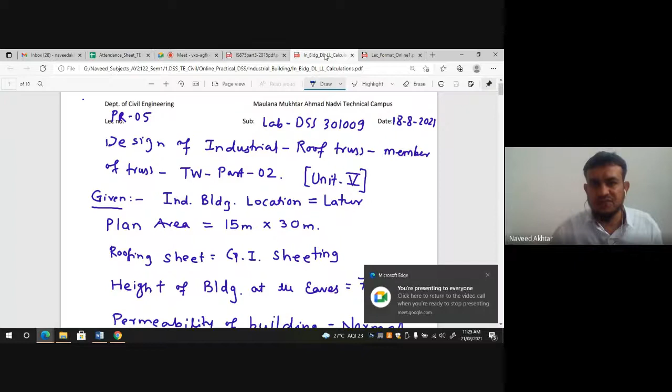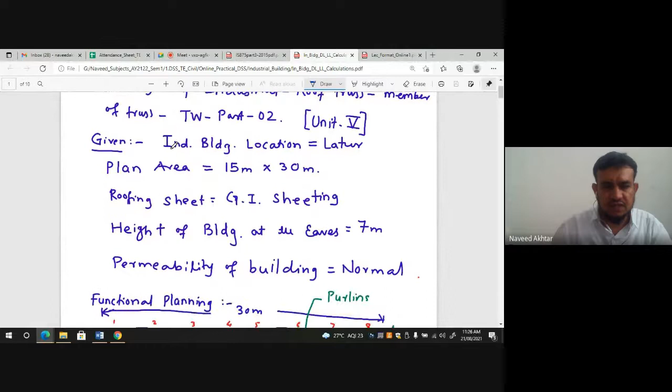So this design of industrial building, roof truss, member of truss, this is our term work part 2 related with unit 5. We are solving the sample building calculations so that you can do your project work after learning this. In the given example, the industrial building is located in Latur.

Plan area is 15 meter by 30 meter, G.I. sheeting is there, height of building at eave is 7 meter, and permeability of building is normal permeability, which we need for the wind calculation.

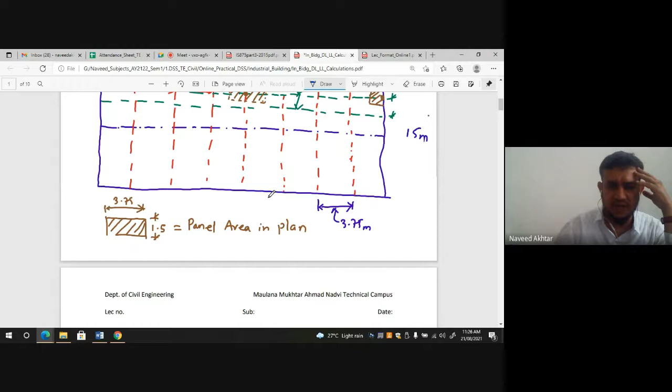Up till now we have done the functional planning of the industrial building: length of building, width of building, spacing of the truss, and spacing of the purlin. We divided the truss into number of panels, 10 number of panels, and calculated panel point loads for the dead load and live load, step by step.

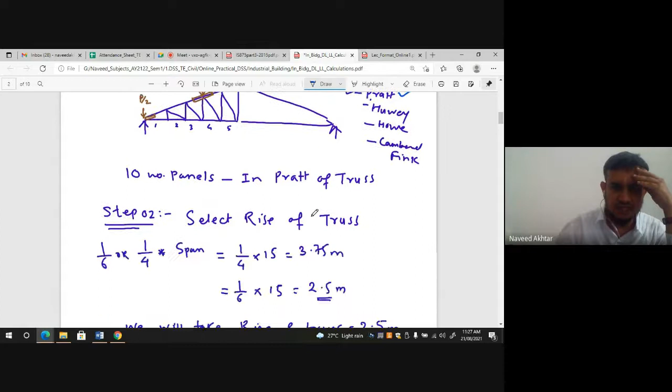Step 1: first we choose the type of truss, and we have chosen the Pratt type of truss, divided it into 10 number of panels, and selected the rise of the truss as 2.5 meter, with spacing of purlin as per the number of panels divided.

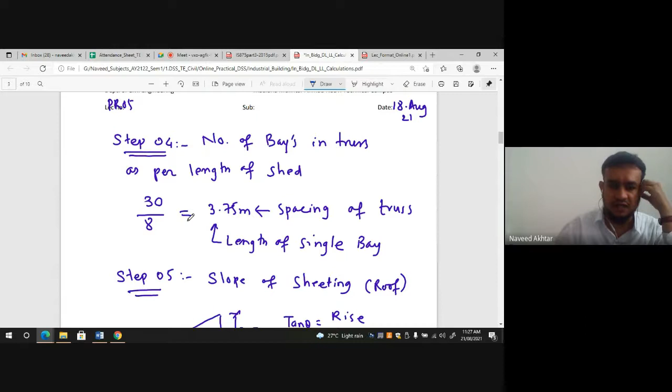Spacing of panel in plan is 1.5 meter. Then we divided the length of the industrial building into number of bays, to provide the columns and truss. We took 8 number of bays, so the spacing of bays, center to center distance of truss, will be 3.75 meters.

Then we find out the slope of the roofing sheet. As we know the rise and span of the truss, from that you can easily find out theta, the slope of the roof.

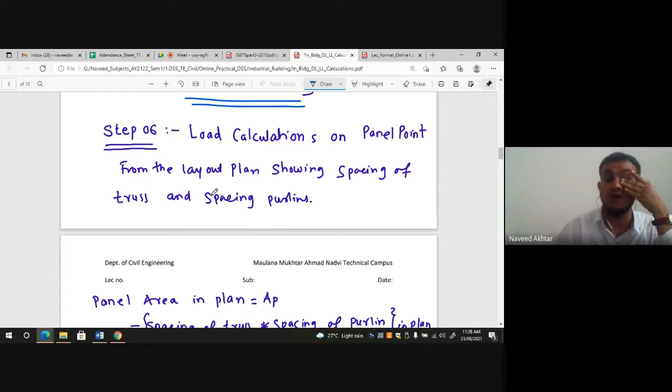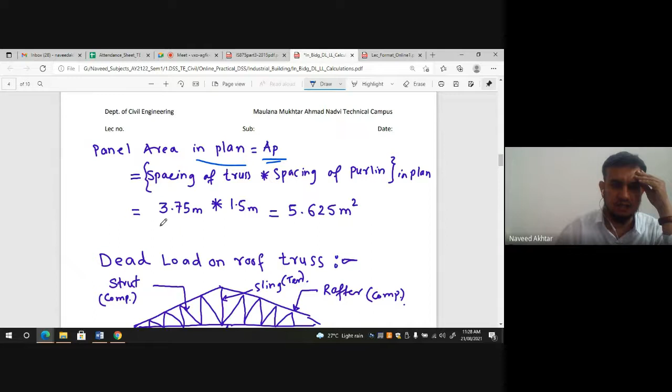Then we come to the load calculation on panel point from the layout plan showing spacing of truss and spacing of purlin. We did the plan, showed the spacing of purlin and spacing of truss in this layout plan, and based on that we find the panel area in plan, AP, which is spacing of truss into spacing of purlin. In plan it gives the panel area, which is 5.625.

Now, cos theta is equal to adjacent upon hypotenuse, not opposite upon hypotenuse - that would be sin theta. The plan area relates to adjacent upon hypotenuse.

Cos theta will be equal to adjacent, that is AP, upon AS, where AS is the sloping area. So AS will be AP upon cos theta. When we divide the plan area by cos theta, we get the sloping area: AP upon cos of theta.

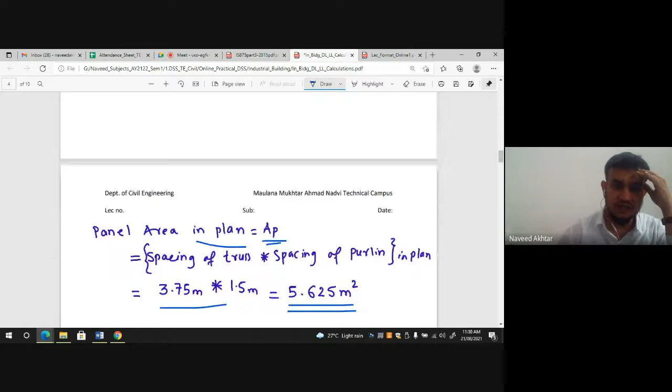And theta, as we calculated earlier in step number 5, the value of theta will be 18.43 degree. So up to this, you have finished.

Then we find out the dead load calculation on the roof truss.

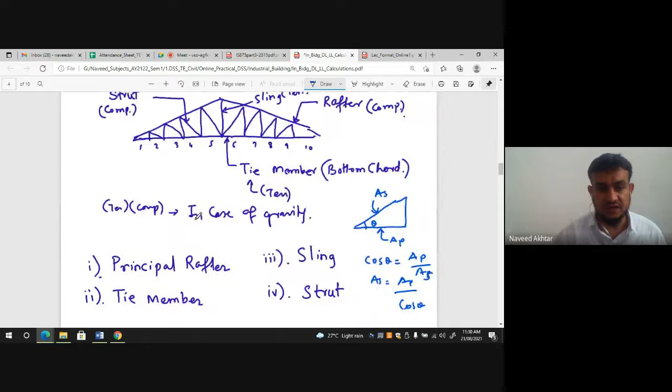We have already divided the truss, the flat truss, into 10 panels: 1, 2, 3, 4, 5 on each side, since symmetricity is there. So 10 panels are divided. And the members of truss we have also shown: sling, strut, rafter, and tie members. 4 types of members are there.

Then self-weight, how to define the self-weight of the truss in plan area? It is dependent on the plan area. It may be in between 100 to 150 Newton per meter square.

Weight of roofing material, that is WR, is considered on the sloping area because roofing sheets are on the slope area. That's why here we are considering slope area.

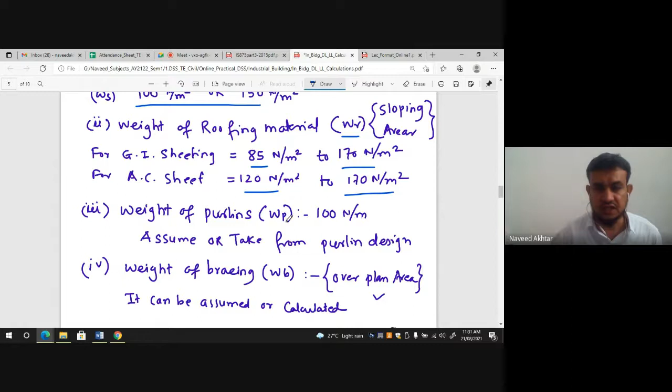Weight of purlins, 100 Newton per meter, you have taken. If it is more than that assumed, then you have to revise the calculation. Otherwise, you can go from.

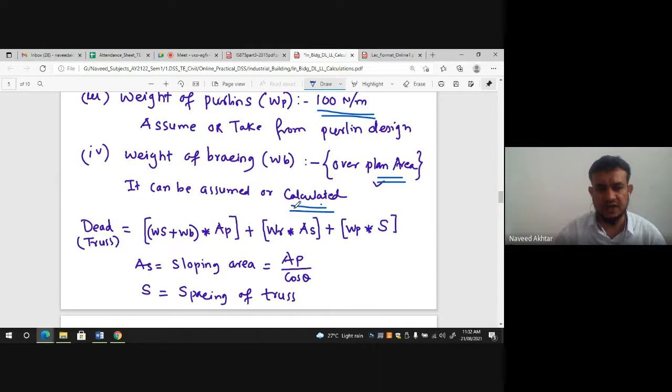The bracing can also be assumed or it can be calculated as provided. So here we will assume. What we will assume, it is generally assumed.

You get load on truss if you find out in kilonewton, then WS and WB, that is self weight and the bracing weight, are in plan area. That's why they will multiply weight into the area, you will get kilonewton, then in Newton.

WR, that's roofing sheet on the sloping area. That's why we are multiplying with the area of slope. Sloping area multiplied with whatever load on your roofing sheet in Newton per meter square. It will come in Newton.

And Newton per meter is the weight of the purlin. If you multiply the spacing of truss, then you will get the load on the purlin in Newton per meter. Newton per meter into this meter, you will get Newton. So all the values you will get in Newton, and then the load on the truss you can find out by putting this value.

So if we will take WS as 100 Newton per meter square, WB as 15 Newton per meter square, WR as 130 Newton per meter square, WP as 100 Newton per meter, and cos theta we know. So AS is nothing but AP upon cos theta, as we have discussed.

Now put all the values and you will get the dead load on your panel point of the roof truss, and then each panel the dead load will be 1.8, 1.8, 1.8. But here at the end there is only half portion load coming. That's why it is 1.8 divided by 2, which is nothing but 0.9. That's why at the end panel the load will be half of the middle panel.

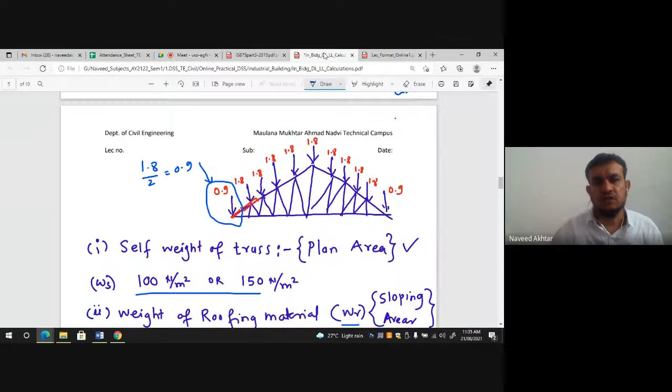Then we find out the live load analysis, live load on the members of truss. This is part two of your step number 6.

So if we have seen the IS code for that, the IS code for that is IS 875, IS 875 part 2. So in IS 875 part 2, there is table 2 there, how to calculate the live load is given, if access is provided, if access is not provided.

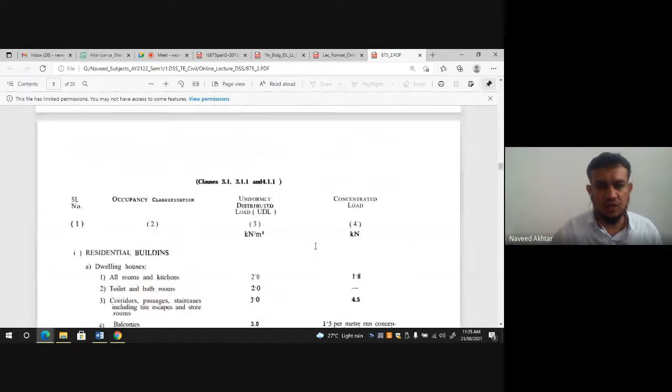So that we have already calculated, but once again I will explain to you how you can find out this load on the floor. So these are loads on the floors, and after that you can get the load for floors in industrial building.

This is industrial building floor areas, and now for the roofing, you can go for the imposed load of the various types of roof.

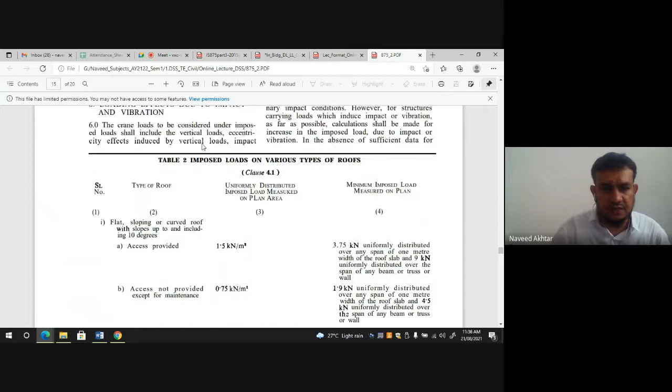Imposed load means live load. We have calculated live load earlier, but once again let's see how to calculate it. Here it is given in the clause that table number 2 gives the live load on various types of roof.

The roof may be sloping. Generally in industrial buildings, sloping roofs are there. So flat, sloping or curved roof with slope up to 10 degrees, and if access is provided, the load will be 1.5 kilonewton per meter square. This is if access is provided and slope is up to 10 degrees, where the slope of the industrial building is up to 10 degrees. So if theta value, what is the theta value?

This is your slope, this is your industrial building, this is theta. If the slope is less than 10 degrees and access is provided, then live load will be 1.5 kilonewton per meter square, which is given in your IS code.

So IS code you can see here, it is visible to you, I think so, IS 875 part. So you can go for that if access is provided and theta is less than 10 degrees. If access is not provided and theta is less than 10 degrees, then live load is 0.75 kilonewton per meter square, or in Newton, 750 Newton per meter square.

When the slope in our case is more than 10 degrees, that is theta is 18.43 degrees, which is greater than 10 degrees, in that case if access is provided or not provided, both have the same case. If you see here, sloping roof with slope greater than 10 degrees, this is the second case here.

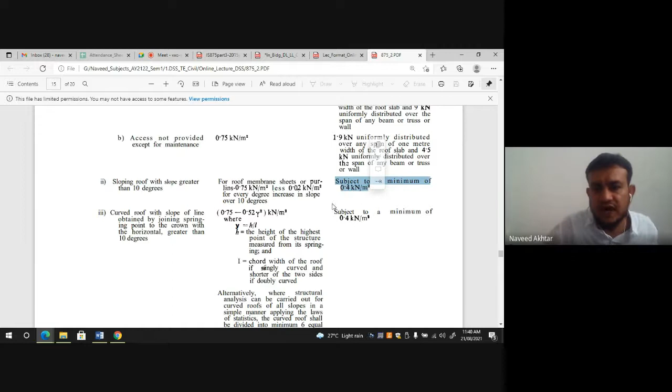Again here one check is there. If you see in the remark, it is subject to minimum of 0.4 kilonewton per meter square, meaning 400 Newton per meter square. So I will write here, our value 581 is greater than 400 Newton per meter square, then we will take this value.

We will take this value, I will round it, for our case, because if this value is less than 400, then you have to take 400. But in our case it is more than 400, so we have to take this. That is the live load on purlin.

When you have to find out the live load on the truss, what we have to do is live load on the truss is 2/3 of live load on purlin. So we have calculated this load as live load on purlin. Many times students make a mistake, directly taking this as the load. This is not your load on the truss, this load is on your purlin.

So you have to transfer this live load on the purlin, 2/3 of 581.4. Now it is Newton per meter square, our load on panel should be in Newton. It is axial load. So live load on panel point, you have to multiply this with your area in plan. Why area in plan? Live load will be coming on the plan, that's why 5.625 is the plan area.

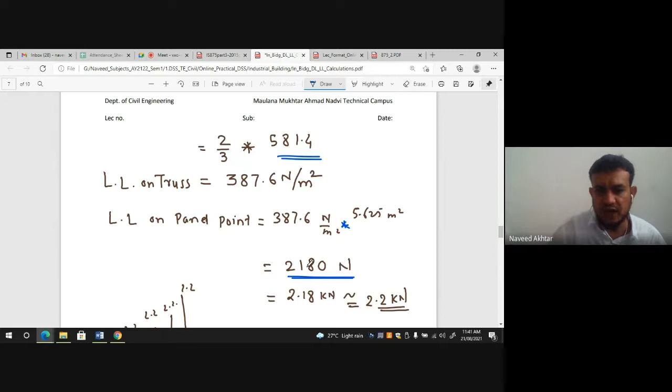When we multiply, we will get 2180 Newton. So we will convert to kilonewton, 2.18 kilonewton. When we round off, it will be 2.2 kilonewton on the single panel.

Then we have to draw this, because this is gravity load. The gravity load is always downward load. So downward load we have drawn here, and each value on each panel is 2.2 kilonewton. But at the end, because only half portion is coming into this load, so half of that 2.2 is coming 1.1, and here also on right side 1.1. This is shown one time.

On the side also the load will be 2.2, 2.2, 2.2, and lastly 2.2. Likewise, the other side of your truss will follow the same pattern.

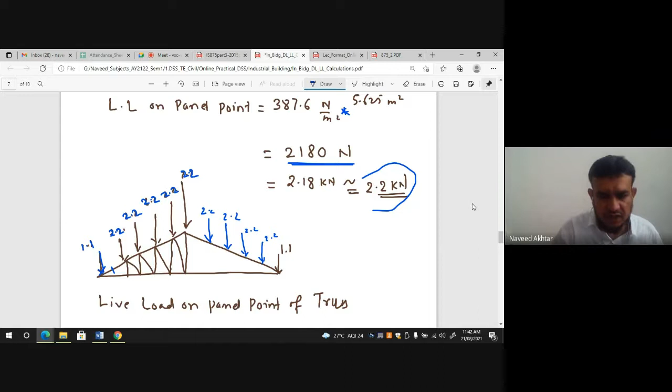So this live load and dead load calculation on the panel points has been completed. Now we'll go for the same example.

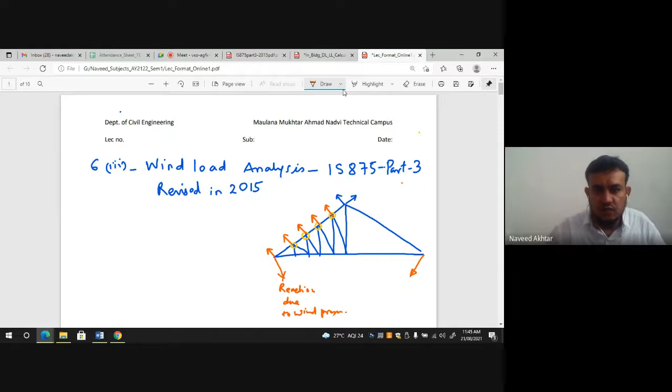Till now you have done the live load analysis and dead load analysis in the previous class. Now today we will go for the wind load analysis for today's practical. So DSS practical 06, for lab, this is lab, and today is 21/8. Okay, so we can go through this.

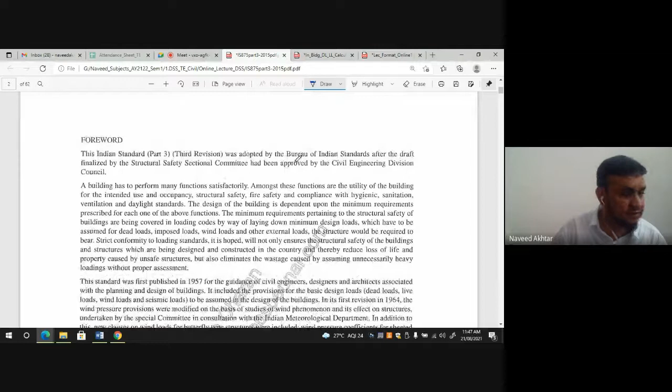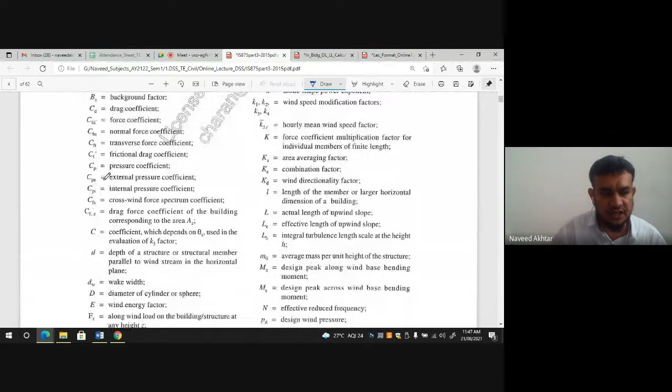So this code gives different notations here. A is the surface area of the structure, Ae is the effective frontal area, Cp is the pressure coefficient, Cpe is the external pressure coefficient, Cpi is the internal pressure coefficient. You can see here Cpi and Cpe. Then depth of the structure and different nomenclatures are given here, starting on page number 2.

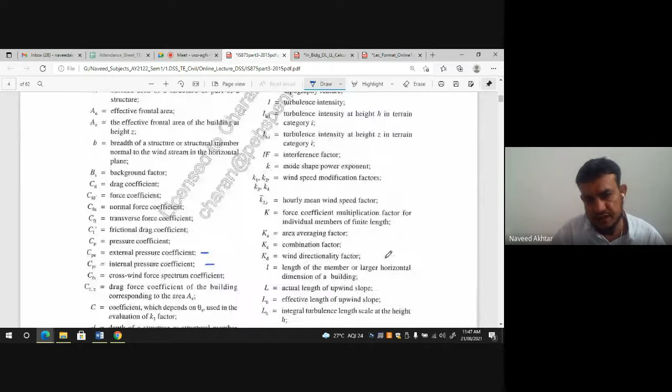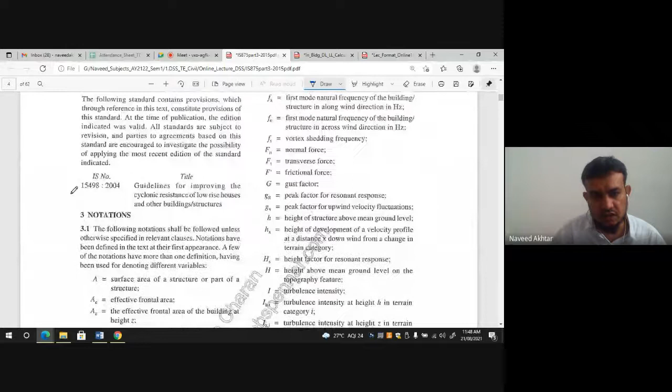They are starting on page number 2. Then Pz is the design wind pressure at Z height, Pd is the design hourly mean wind pressure corresponding to Vz. And then we know we have to calculate F, the force coming on the structure, there is normal force, which is the force normal to the surface, due to the wind pressure.

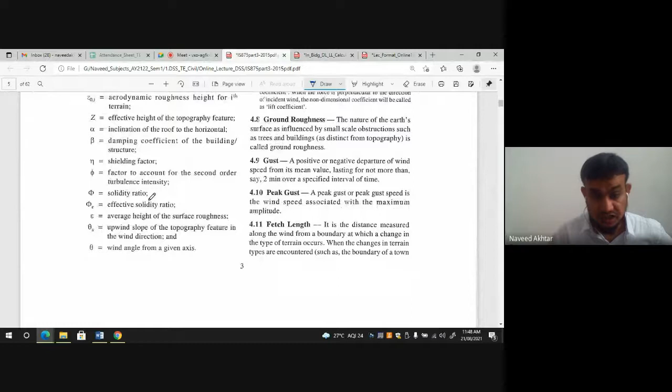You have to calculate this, and different terminology like angle of attack, breadth of building, depth of the building, horizontal dimension, developed height, effective frontal area, elemental surface, force coefficient, ground roughness, gust - positive or negative departure of wind is called gust with speed, peak gust, fetch length. So different terminologies are given at the start.

Then what is wind and what is wind speed - generally wind is measured in speed. So design wind speed is Vz, and based on the basic wind speed, what is given in figure number 1, there are different zones for the wind pressure. So the basic wind speed is given in the figure, there are different zones divided in figure number 1.

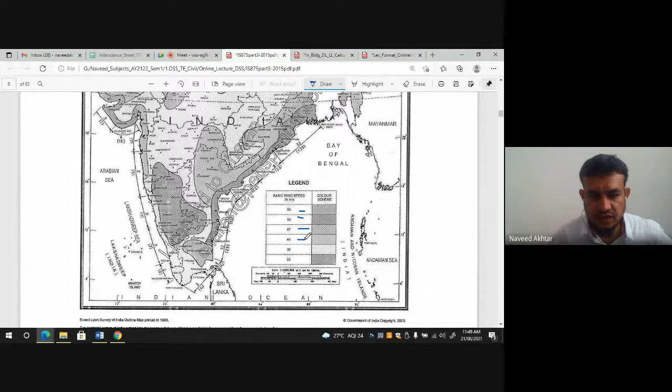These are the different zones - basic wind speed zones are there, and here the value in meters per second: 55, 50, 47, 44, 39, 33. There is correct color coding here, shown in gray scale. You can download the wind map of India also, where the color coding scheme is shown.

So from the color coding, you can easily find out the wind speed for different zones, as shown in the figure, if possible.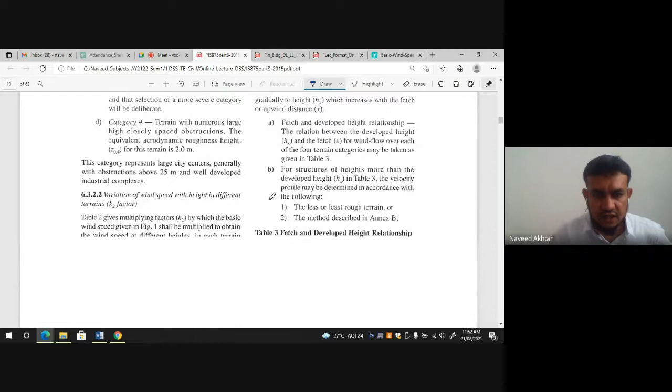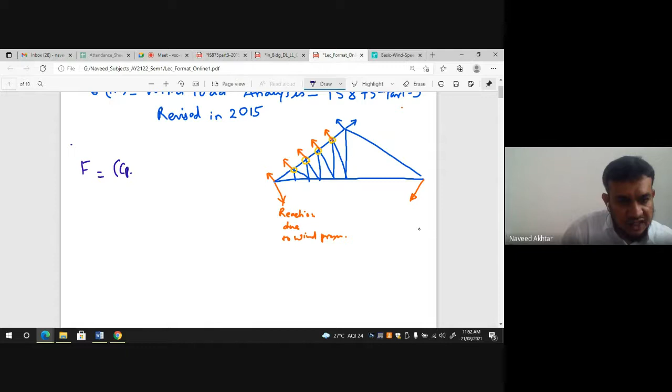So first, when you are going to find out the wind pressure, it is given on page number 10, wind force. This wind force F is equal to CPE minus CPI, into area, into design wind pressure PD. And PD you can find out from three factors: KD, KA, KC into PZ.

PZ is design wind pressure, and PZ you can find out - it is nothing but 0.6 times of Vz square. We will go through all these clauses, and Vz is the design wind speed. You can find out Vz by the different constant factors, that is K2, K3, K4 into basic wind speed Vb.

Okay, so now we will go the reverse way - how we can find out these values? First you have to find out the Vb. How do you find out Vb? You can find it from the map.

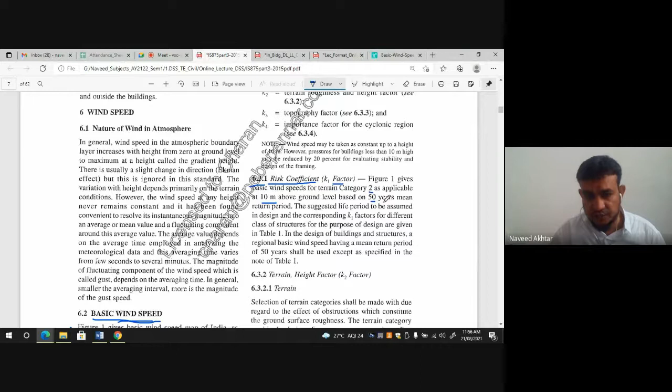So if you go here, 6.3.1, page number 5, this one. 6.3.1, Risk coefficient factor K1. Figure 1 gives a basic wind speed for terrain category 2, as applicable 10 meter above ground level, based on 50 years mean return period. The suggested life period assumed in design corresponding to different class of structure is given in table number 1.

The value we can find out from table number 1, that is risk coefficient factor K1. So K1 is the probability factor or risk coefficient factor. We can find it out from clause 6.3.1, and when we read that, based on the terrain, the K1 factor will be found from table number 1.

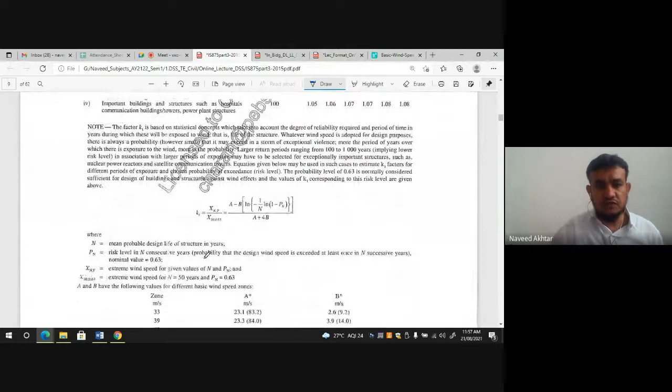If you see table number 1, this is the coefficient for different class of structures, different values. For all general buildings and structures, 50 years return period, our basic wind speed is 39, second column. So for all general building and structures, for 39, the K1 value is 1, as you can see here from the table. So our K1 value, risk coefficient factor, we get from table number 1.

From table 1 of your IS 875, part 3, page number 7. So page number 7 is given, right here, page number 7.

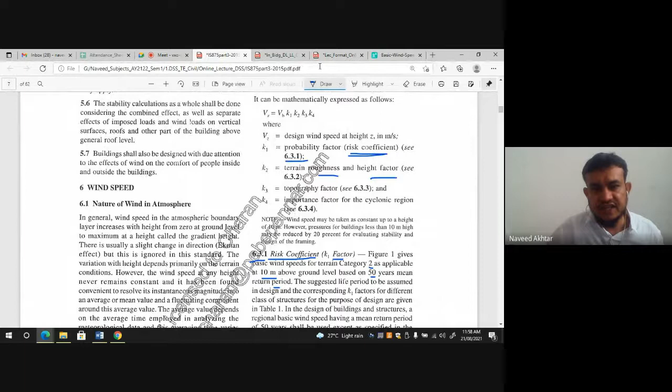Now, second, third value we need is K2, K3 value. K2 value is nothing but will come here, page number 5 again. You can see here K2 is terrain roughness and height factor, and it is given in clause 6.3.2. We will come to 6.3.2 terrain height factor K2 factor.

So I will write down here, K2 is the terrain roughness and height factor, K2. We'll read here clause number 6.3.2.

The selection of terrain category shall be made with due regard for effect of obstruction which constitutes the ground surface roughness. The terrain category used to design a structure may vary depending on the direction of wind under consideration. Wherever sufficient meteorological information is available about the nature of the direction, the orientation of any building or structure may be suitably planned, if given. The terrain in which the specific structure stands shall be assessed in the following terrain categories.

Category 1 is exposed open terrain with few or no obstruction.

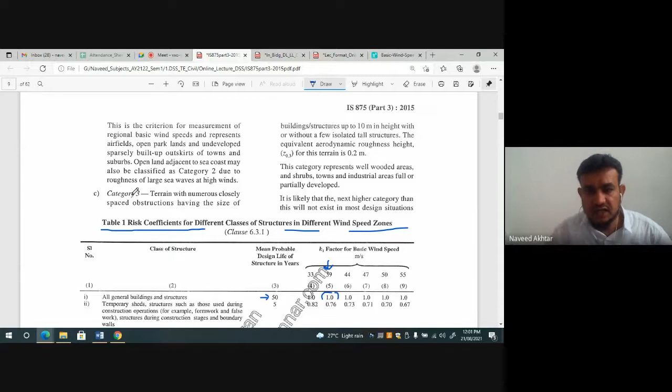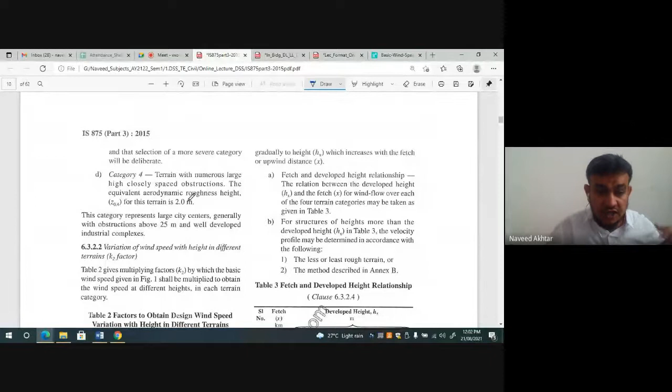That's what we have selected. Now this category is well wooded areas and shrubs, towns, this is for category 3. And then category 4 is also there - terrain with numerous large highly closely spaced structures. Now, found of table number 2.

Factor to obtain design wind speed variation with height for different terrains. In our case, the height of building is 7 meter, I think so, it is given in our example. So height of building is given as 7 meter, we will write here the height of building is 7 meter.

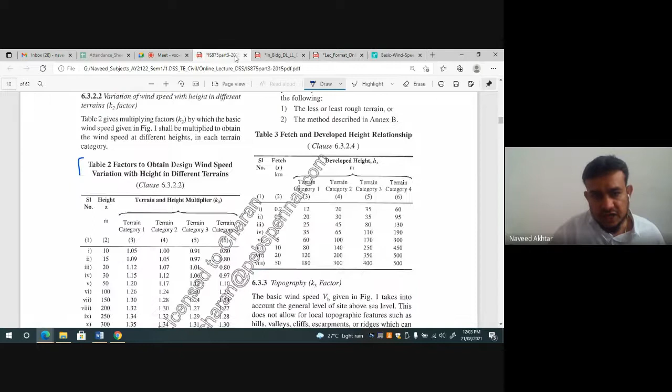So if you look at table number 2 of clause 6.3.2, IS 875, you can see here - if you take category number 2, and our height of structure is up to 10 meter, the terrain category value is 1. The K2 value is also 1 in our case, so I will write here the K2 value is 1. Now we will find out the K3 value.

K3 value is nothing but, if it is here, we will go again to the page number for K3 value. K3 value is the topography factor, clause 6.3.3. So K3 value, if I write, is nothing but the topography factor.

Topography factor, topography factor, and it is on clause number 6.3.3. We'll go to clause number 6.3.3, topography vector K3 factor.

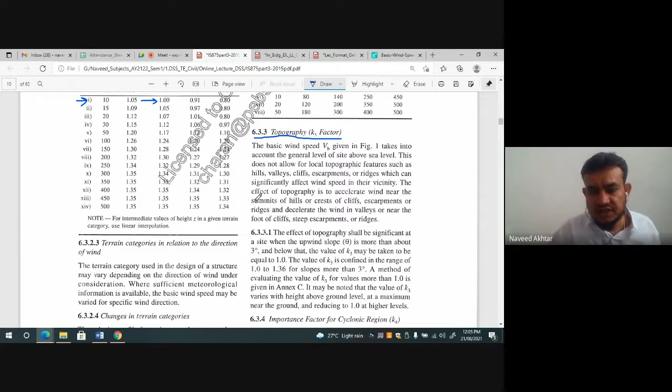So in their vicinity, the effect of topography is to accelerate the wind near the summit of hills, crest, or cliff. At that location, the wind speed may change as per the slope and depression, escarpment or ridges, and deaccelerate the wind in valleys or near the foot of the cliff, steep escarpment or ridges.

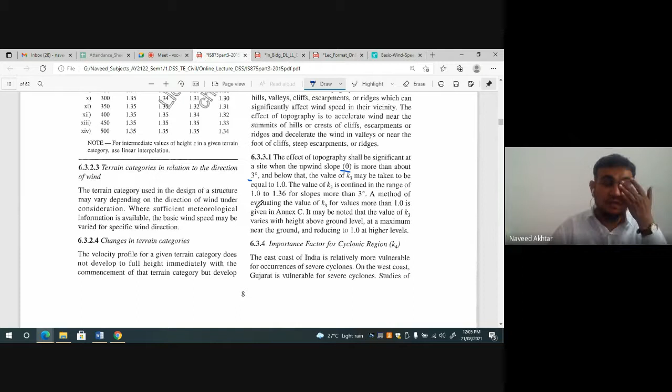The effect of topography shall be significant at the site when the upwind slope theta is greater than about 3 degrees. If upwind slope is greater than 3 degrees, then the K3 value is confined to the range of 1 to 1.36 when more than 3 degrees.

If slope is more than 3 degrees, then the K3 value can take 1 to 1.36. It may be noted that the value of K3 varies with the height above ground level, being maximum near ground and reducing to 1 at higher level. So if upwind slope is more than 3 degrees, then only the effect is counted, and the value of K3 will be in the range of 1 to 1.36, and for that we have to see Appendix C also, which is at the end. Based on that you can calculate, or you can assume in our case K3 value is also equal to 1.

Next, Annex A is for the basic wind speed of major cities or towns. Agra 47 meter per second, Ahmedabad 39, Cuttack, Darbhanga, Delhi, whatever given, you can find out from here. The basic wind speed for main cities is given in this annex, Annex A, we can take from there. Annex B deals with terrain category changes, and Annex C is the effect of cliff or escarpment, or the equivalent height above ground factor.

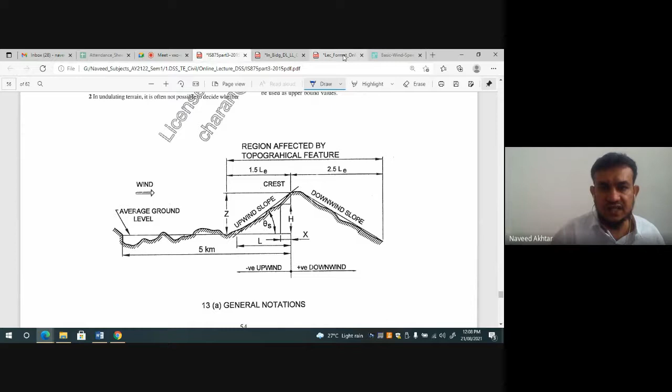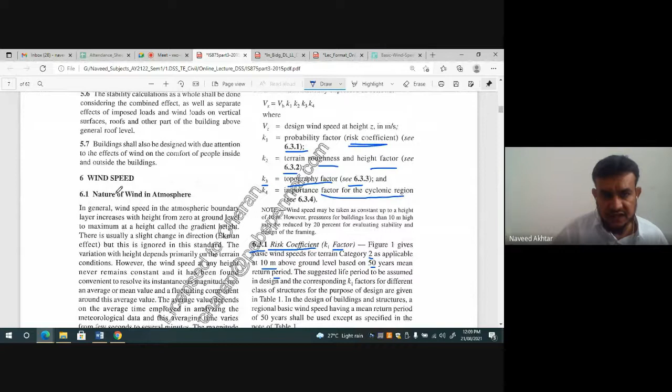Now we have to find out K4. K4 is nothing but, these all things are given in your IS code, that's why they call it the guideline for design. So K4 is the importance factor for cyclonic region. K4 is importance factor. This is introduced in this new code. Earlier only K1, K2 and K3 were there.

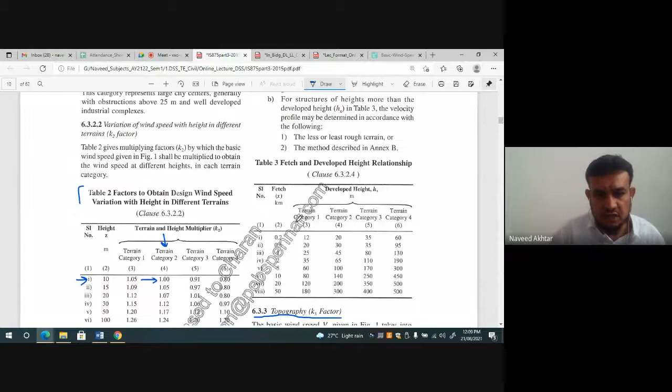It is very important. The K4 factor is the importance factor, and that is also given in clause number 6.3.4. So we'll come to clause 6.3.4, importance factor for cyclonic region K4. The east coast of India is relatively more vulnerable, meaning where Odisha is, Kolkata is there, and also on the west coast Gujarat is vulnerable for severe cyclone. Studies of wind speed and damage to buildings and structures find the fact that the speed given in the basic wind speed map is often exceeded during cyclone. During cyclone time the wind speed becomes higher than basic speed. The effect of cyclonic storm is largely felt in a belt of approximately 60 kilometers.

Okay, I think all of you are getting understanding and you are writing. If you are writing, then only you can understand. If you are not writing, then you will not understand. Now I'll say, keep your camera on so that I can see whether you are writing or not. Still you are not listening.

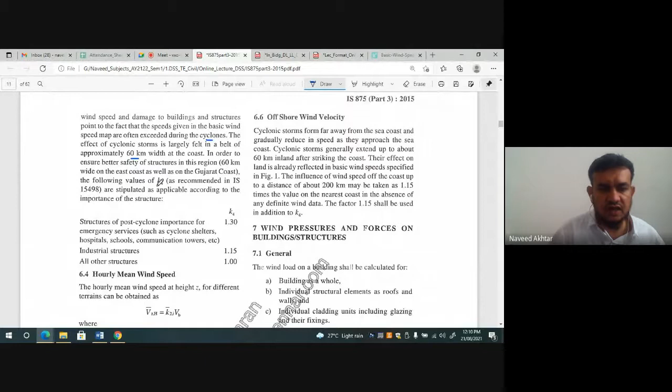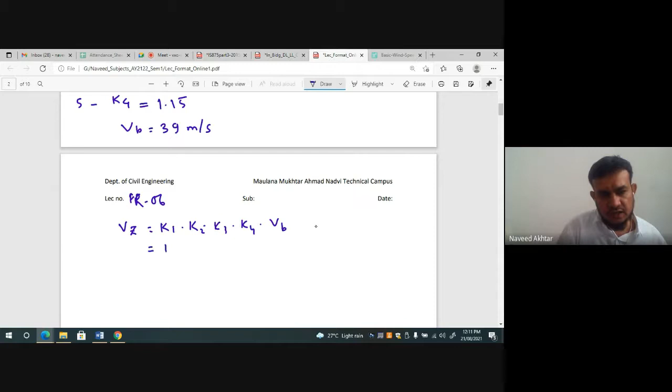Okay, now you can find out Pz easily. What is the value of Pz? Pz is given in your clause, here you can see how to calculate Pz. This is page number 9, clause 7.2. Design wind pressure Pz is equal to 0.6 times Vz square. So we already know Vz, so 0.6 times Vz square, that is 0.6 into 44.85 square, you will get the Pz value. After calculating, you will get the Pz value as 1207 Newton per meter square.

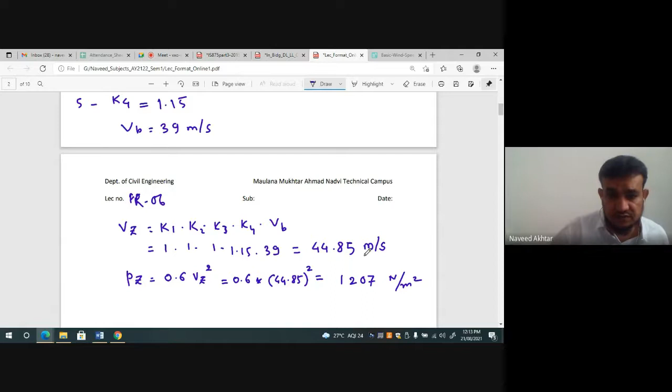This is our Pz value, the design wind pressure. From clause number 7.2, design wind pressure, Pz is the wind pressure at height Z. So this is the wind pressure, Pz, from clause 7.2.

Now design wind pressure PD is equal to, now here it is given, design wind pressure PD is equal to KD, KA, KC, PZ. Again here three factors are there. PD is equal to KD, KA, and KC into PZ.

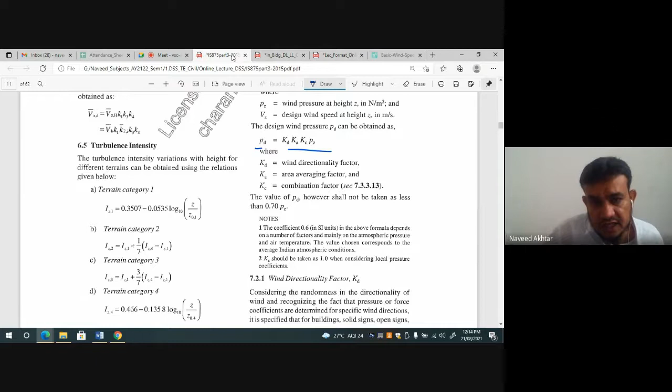Okay, this formula is given KD, KA, KC. What is KD? KD is the wind directional factor. So clause 7.2.1, you can find out the KD. Write down clause number 7.2.1. What is this KD? KD is the wind directionality factor.

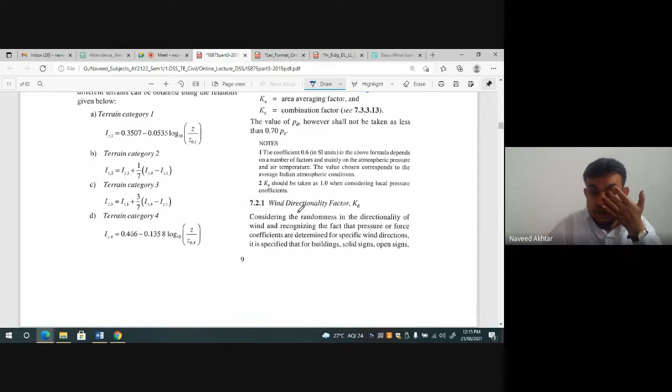And how is it calculated? Considering the randomness in the directionality of the wind and recognizing the fact that the pressure or force coefficients are determined for a specific wind direction, it is specified that for buildings, solid signs, open signs, lattice framework, and truss tower, triangular, square, rectangular, a factor of 0.9 may be used in design wind pressure. For circular and near circular, factor will be taken as 1.

So in our case, our building is with the truss, and the truss is triangular. That's why we can take the KD factor here as 0.9. If our building is circular, then we will take 1. But in our case it is 0.9 because it is the triangular rectangular building, as our truss is also triangular.

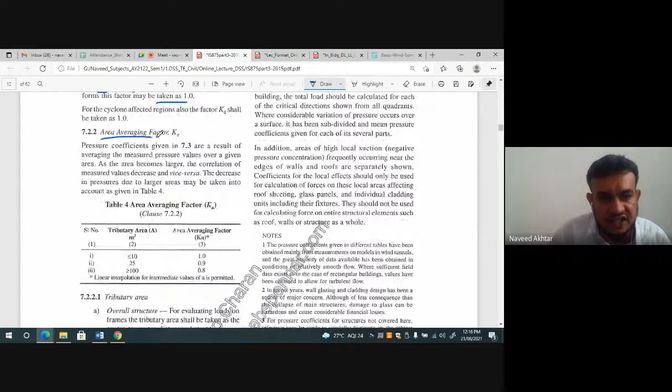Now, second is the Ka factor, that is the area averaging factor. I will write down Ka factor. Clause number 7.2.2. That is area averaging factor, Ka, area averaging factor.

Clause number 7.2.2, page number 10 itself. The area averaging factor Ka is given as: tributary area in meter square less than or equal to 10, the area averaging factor is 1.

Now our tributary area - the pressure coefficient given in 7.3 are a result of averaging the measured pressure values over a given area. As the area becomes larger, the correlation of measured value decreases and vice versa. The decrease in pressure due to the large area may be taken into account as given in table number 4, of IS 875 part 3, page number 10.

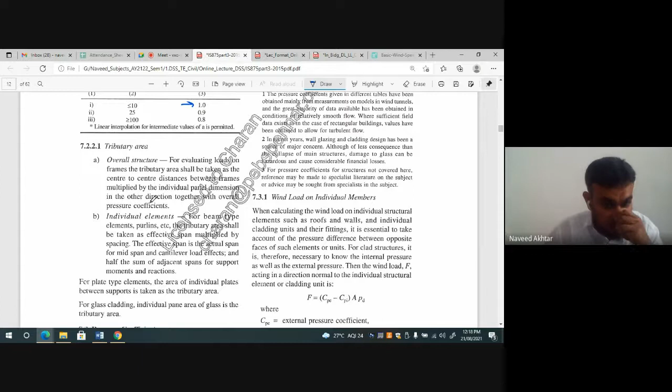So in our case, if I take the tributary area, it is nothing but 15 is our one panel, and the distance between bay is 3.75. So if I find out the tributary area, in our case 15 is the width, and 15 by 3.75, the length of bay, is coming to something 56.25. I think so, I'm not wrong. Okay, so this is 25.

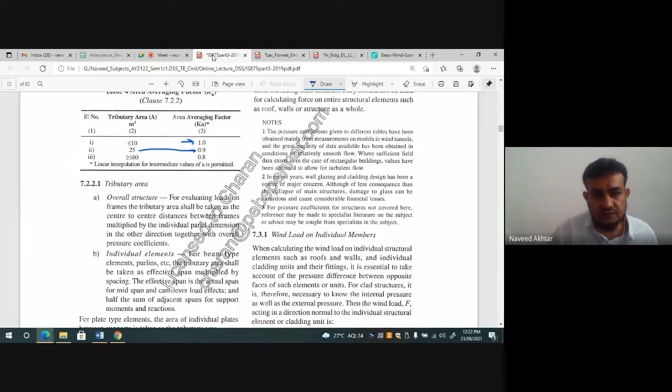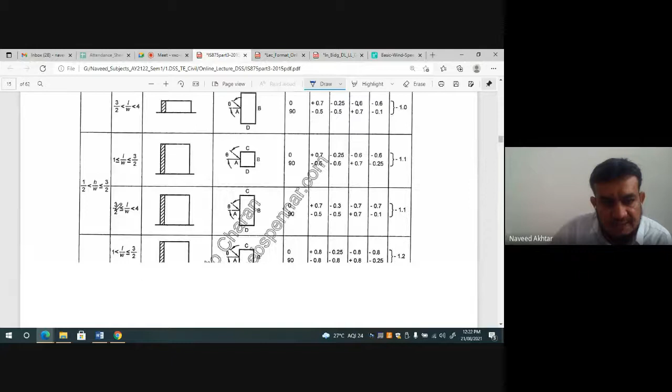So in the IS code, IS 875 part 3 of 2015, window, individual window you can find out, but here clause 7.3.3.13 you can go for that, for the Kc combination factor. We will go to page number 16, it is given there.

Frames: when taking wind loads on frames or cladding of a building, it is reasonable to assume that the pressure or suction due to wind, inside or outside of the structure, shall not be fully correlated. Therefore, when taking the combined effect of wind load on the frame, a reduction factor of Kc equal to 0.9 may be used over a building envelope when the roof is subjected to pressure and internal pressure is suction, or vice versa. So both cases can happen, it may be pressure, it may be suction. In that case, the combined effect you have to reduce, and the Kc factor also you have to take as 0.9.

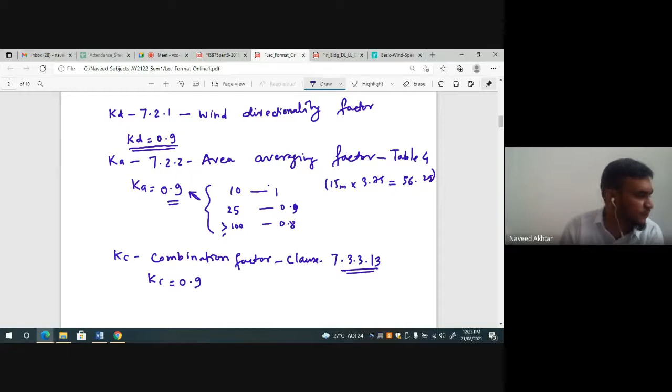Now all the factors we know. Now the design wind pressure PD you can find out. KD you have found, that is 0.9. Ka, area averaging factor, you have found, that is also 0.9. Kc also from clause 7.3.3.13 is found as 0.9.

Into here, Pz already we have calculated above, that is 1207 Newton per meter square. So your design wind pressure PD will be 879.9 Newton per meter square.

So now we know PD only. We know the area, the slope area, 5.625 divided by cos theta. We know this area. Now we know PD is 879.9 Newton per meter square.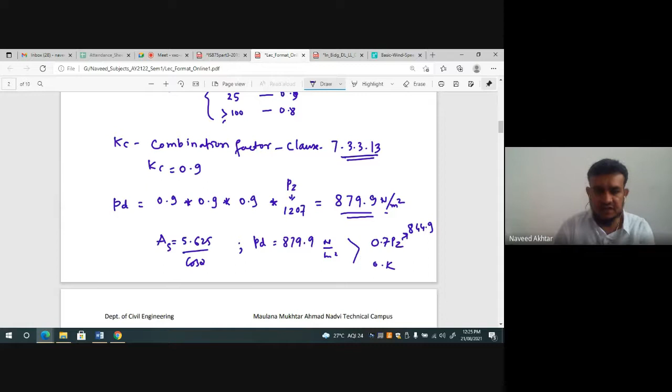That is also okay. Now in our case, you know that the design panel point load F is equal to CPE minus CPI into area into sloping area, because it is actually normal to the slope. Therefore PD we already calculated, so this wind pressure, design wind pressure we know, the area we know.

Now you have to find out this CPE minus CPI. So CPE minus CPI is nothing but, this you have to find out. CPE you have to find, CPI you have to find, and then you can find out CPE minus CPI. This term is not just a minus term, it is due to the internal and external pressure coefficients.

So CPE is the external pressure coefficient, and CPI is the internal pressure coefficient. External pressure coefficient and internal pressure coefficient, okay.

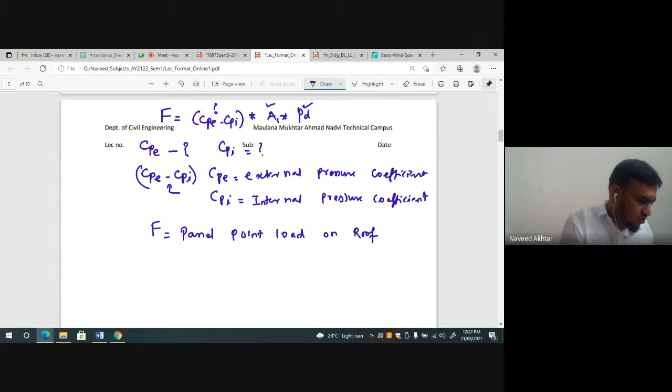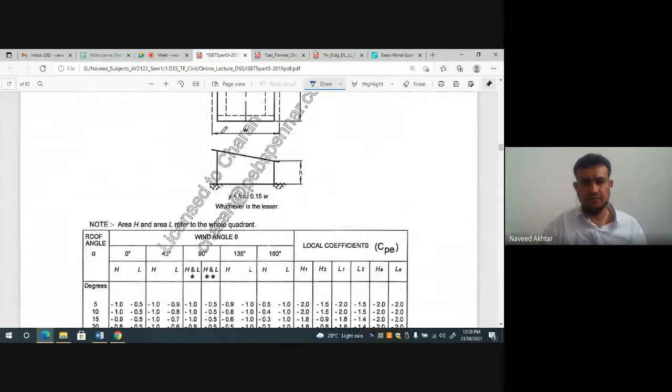Okay, so understanding this also requires a lot of time. It is not finished. No, so you will stop here. You will read the clauses on this wind code, IS 875 part 3. All this is given in IS 875 part 3 2015. So you have to make this study regularly, and then you will be able to find out the final point load.

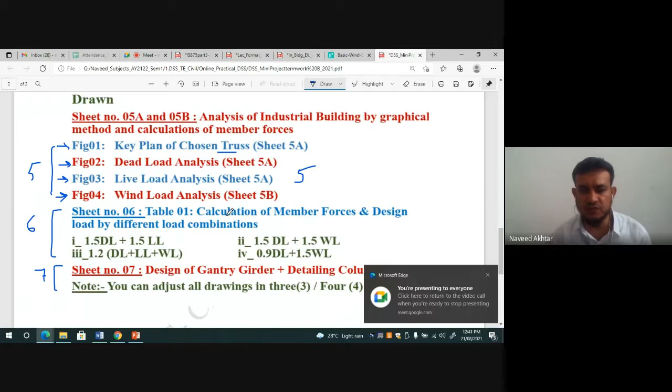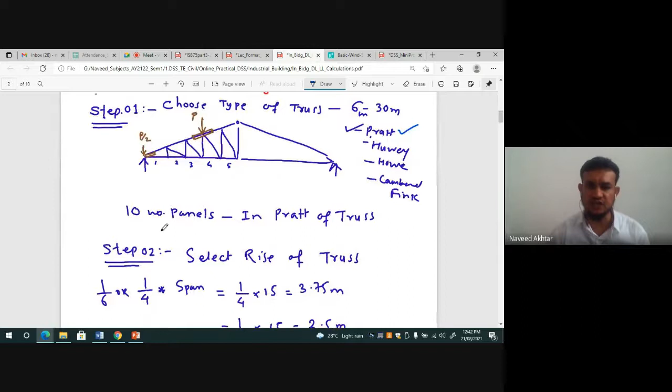शीट में की प्लान आपको बनाना है, की प्लान, वो सब फिगर कैलकुलेशन के साथ आपको बनाना है, जैसे ये कल कैलकुलेशन मैंने बताया था, ये फंक्शनल प्लानिंग, ये सब आपके जनरल पेजेस पे बनाना है। जनरल पेजेस पे आप जिधर लिख रहे हैं उसके सामने ब्लैंक पेज आता है, एक तरफ लाइन वाला पेज रहता है, दूसरी तरफ ब्लैंक पेज रहता है। उस पे बनाते जाइए ये सब फिगर साथ साथ में। ये साथ साथ में बनाना जरूरी है जनरल पेजेस पे। ये फिगर इसमें बनानी है क्या सर शीट में?

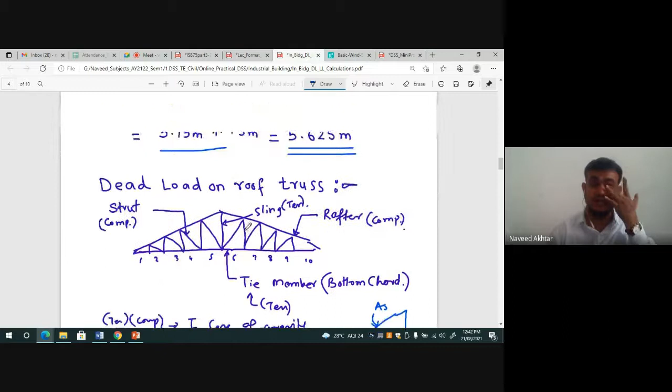शीट पे नहीं बनाना है, शीट पे सिर्फ की प्लान रहेगा। जैसे ये ट्रस आपने 10 पैनल में डिवाइड किया, उसके एक्चुअल डायमेंशन के साथ, स्केल के साथ आपको शीट पे की प्लान बनाना। फिर वो स्केल के हिसाब से आपको

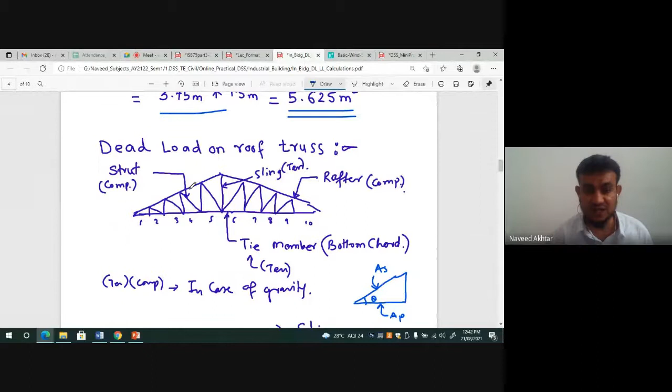डेड लोड एनालिसिस किस तरह करना है ग्राफिकल मेथड से वो बताऊंगा, विंड लोड एनालिसिस कैसे करना है, वो सब फिगर आपके हैं। सर हमें शीट पे क्या बनाना है पहली शीट में अभी? वही बता रहा हूँ ना बेटा, की प्लान बनाना है। ये की प्लान हो गया आपका, ट्रस जो बनाएंगे आप की प्लान हो गया, इसमें पहली फिगर। अब इसमें डेड लोड एनालिसिस करना है ग्राफिकल मेथड से, वो एनालिसिस कैसे करेंगे वो बताऊंगा मैं आपको।

अभी हमारा सिर्फ लोड कैलकुलेशन चल रहा है, अभी ग्रेविटी लोड हम लोग डेड लोड, लाइव लोड मालूम किया, अब विंड लोड मालूम कर रहे हैं पैनल पॉइंट। अब जब पैनल पॉइंट लोड मालूम हो जाएंगे तो फिर ग्राफिकल मेथड से डेड लोड मेंबर फोर्सेस कैसे मालूम करना है वो बताऊंगा, फिर वो बनाना है आपको। लाइव लोड का किस तरह निकालना है वो बताऊंगा, विंड लोड का किस तरह मेंबर फोर्सेस निकालना है ग्राफिकल मेथड से बताऊंगा। तो ये शीट पर बनाना है और शीट से ही मेंबर फोर्सेस आपको निकालना है ग्राफिकल मेथड से। कैलकुलेशन के जरिए भी निकाल सकते हैं, लेकिन वो न्यूमेरिकल मेथड आपको इसमें एग्जाम में नहीं करना है। इसमें ग्राफिकल मेथड आप सीखेंगे किस तरह मेंबर फोर्सेस ट्रस के निकाले जाएं।

आपने मैकेनिक्स में फर्स्ट ईयर में ग्राफिकल मेथड से मालूम किया है मेंबर फोर्सेस और न्यूमेरिकल मेथड से भी मालूम किया है, सॉम में भी किया होगा ट्रस में। तो दैट मेथड यू टू अप्लाई हियर, और मेंबर फोर्सेस ट्रस के मालूम करके फिर आपको वो मेंबर का वर्स्ट कॉम्बिनेशन ऑफ लोड निकालना है फोर्स टेबल में, और फिर उस वर्स्ट कॉम्बिनेशन के लिए आपको डिजाइन करना है मेंबर। अगर कॉम्प्रेशन की वैल्यू ज्यादा तो कॉम्प्रेशन के लिए डिजाइन करेंगे, टेंशन के लिए चेक करेंगे, और अगर टेंशन की वैल्यू ज्यादा तो टेंशन के लिए डिजाइन करेंगे, कॉम्प्रेशन के लिए चेक करेंगे, वाइस वर्सा।

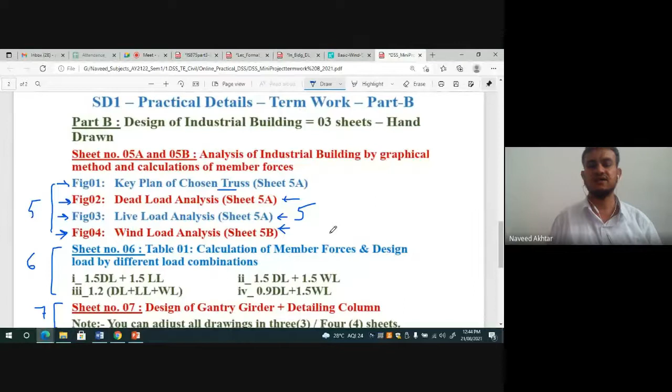और कुछ क्वेश्चन? नहीं सर। कोई क्वेश्चन है आपका? नो सर। लेक्चर अटेंड नहीं करते आप? यस सर।